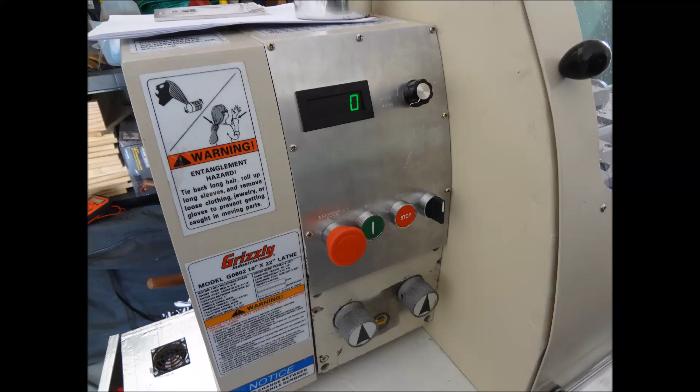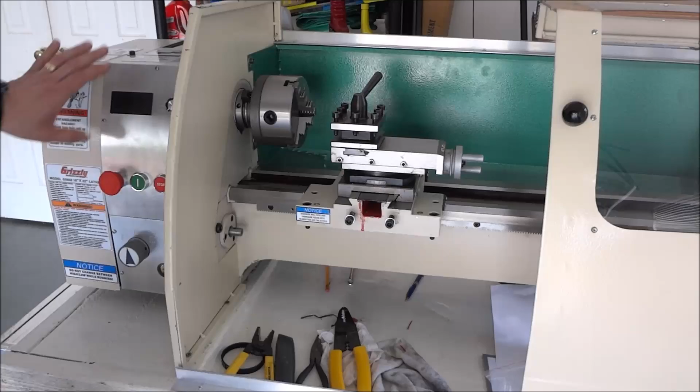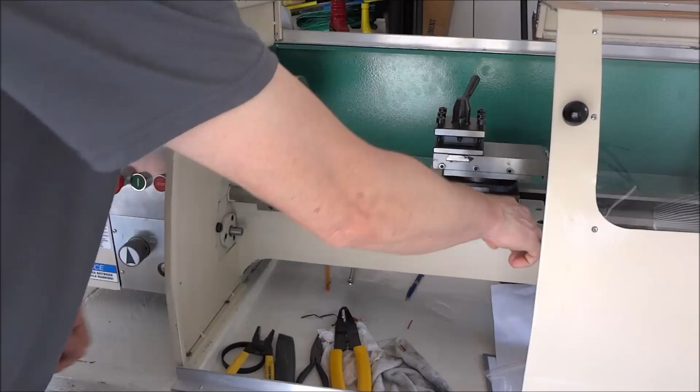Okay, so now that we've got our VFD, our electronics cabinet all connected, we've got the lathe running. Now it's just a matter of starting to do our mounts for our ball screws. First we're going to tackle the Z-axis so we can get this moving back and forth. And to do that, we've got to make some mounts to mount under our cross slide, and also an adapter to go onto our gearbox here. And so those are the things we're going to concentrate on first. So let's get started.

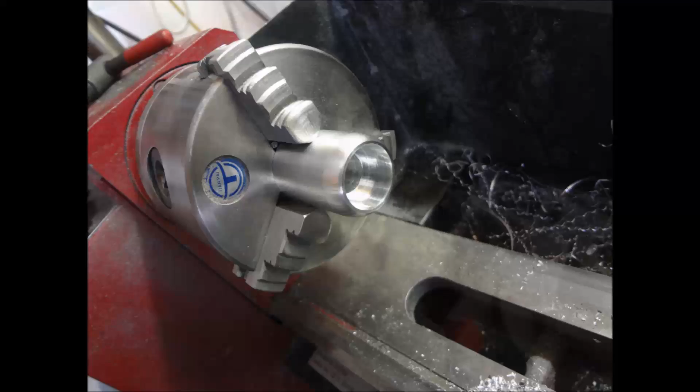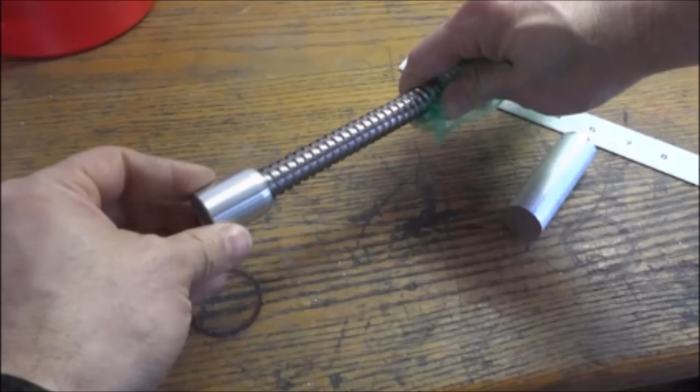Okay, so we've made our coupling. This portion right here goes on the shaft of the change gears. The bearing here rides on the end of the ball screw, like so. And then the ball screw will be able to turn freely. Very good design. It utilizes the shaft that's already there to keep everything centered. There are actually two bearings in here to give it a little bit more stability. It's just made out of aluminum, some 1-inch stock. Alright, so our coupling's made.

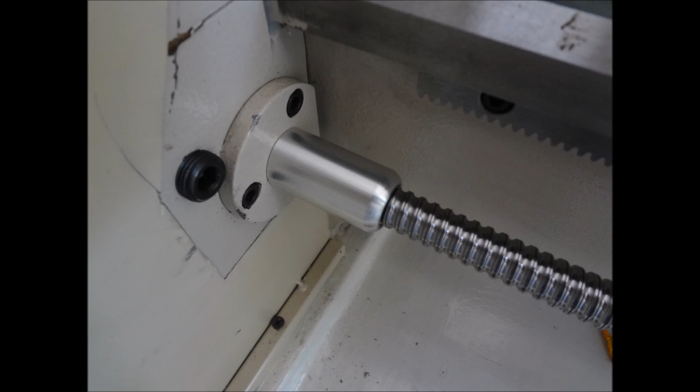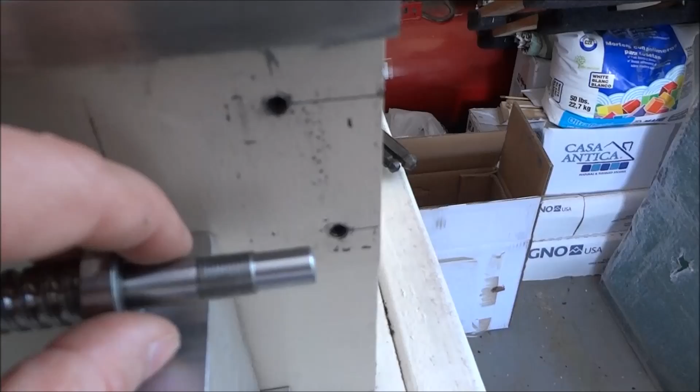Okay, so we've got our ball screw in and our coupling in. And so now I'm going to try to work on my mount here. I'm going to make a back plate right here. This is just going to be some 1/4-inch flat stock, and I'm going to work on it now.

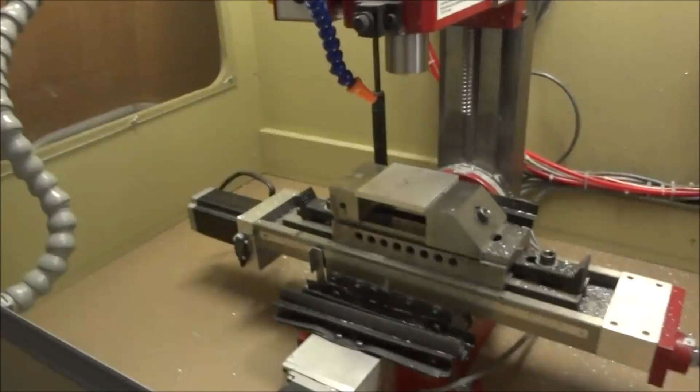Okay, so now I'm working on the Z-axis stepper and ball screw bearing mounts, and this is a back plate. So let's cut it out. Got it loaded in Mach 3 and ready to go. Got a 3/8" end mill to do the side cleaning. Now we're doing a finishing pass. Line cutting.

Okay, so we're going to start drilling our holes now. I've got 4 holes I need to drill. Got a center drill in here. Okay, I'm going to drill 4 holes. I'm using a 1/8 stub drill. This is 7 inches per minute, no peck.

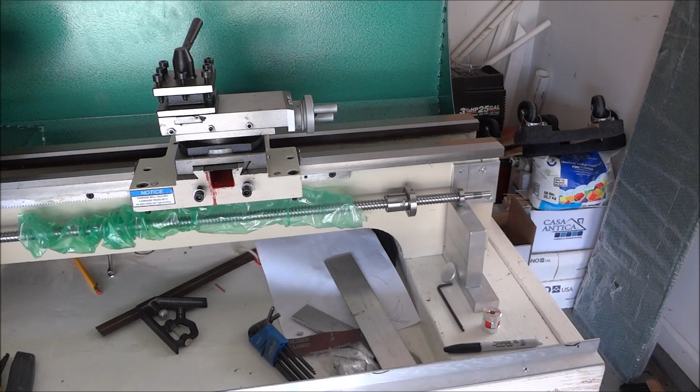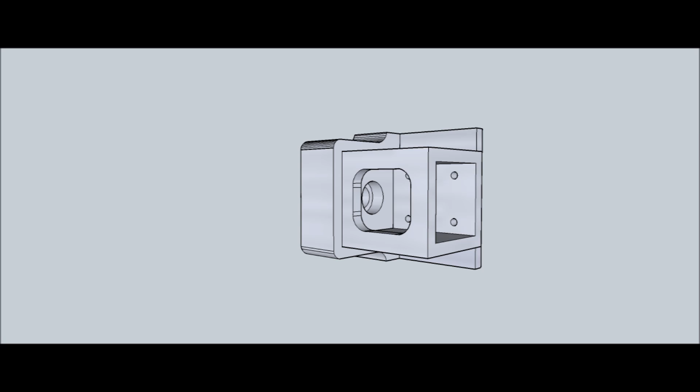So now that we have our back plate made, the next piece is going to be our bearing block. There'll be 4 pieces total when we get finished with this bearing motor mount for the Z-axis. Here is a model that I drew up in SketchUp of the finished assembly, and you can kind of see how it's being pieced together. And so now let's start machining the bearing block.

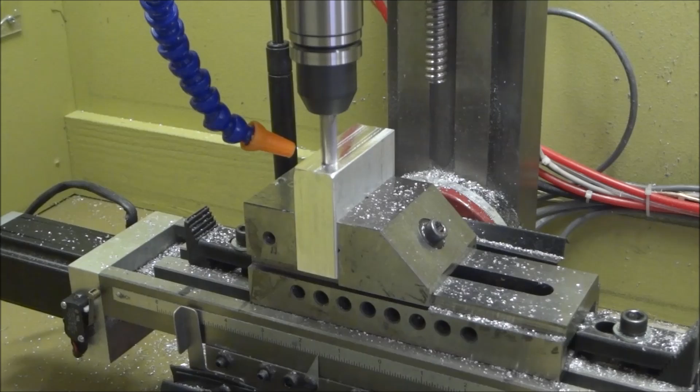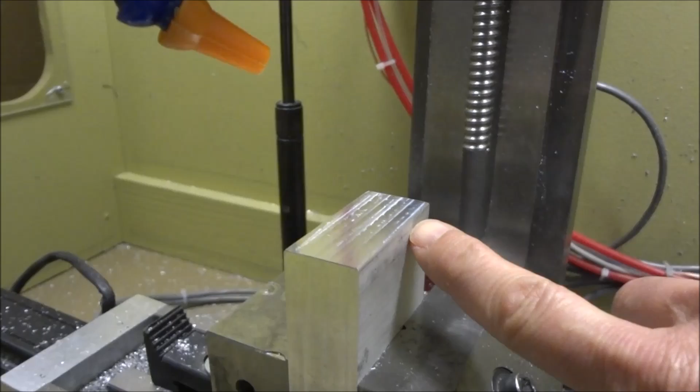Okay, we're working on our bearing block for our Z-axis. Right now I'm squaring all 4 sides. I'm using a 3/8 inch end mill, 8 inches per minute at 0.02 depth of cut, 20,000. I'm actually going to be putting a small radius here and taking off about a 1/4 inch, and then putting a small radius here. Now I could have laid this flat and did a profile. However, this piece right here was almost exactly the right size, and clamping it up would have been a little difficult, so I decided to go this route.

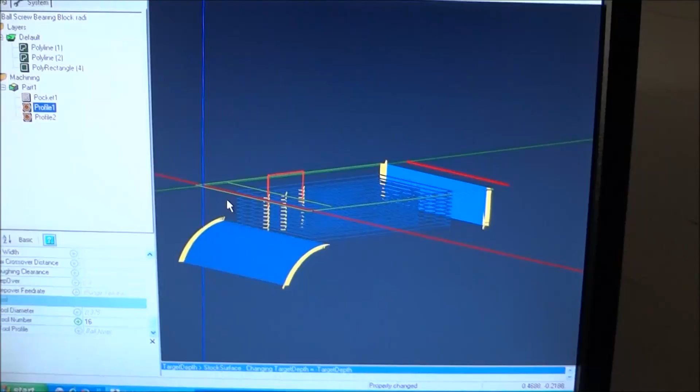These are the tool paths that I'm going to be doing in my CAM program. I've got a couple of radius profiles which will be done with a 3/8 inch ball nose, and then the step will be taken care of with a 3/8 inch 4 flute end mill. We're going to do the pocket first.

Okay, so we finished our step, and now I'm just putting in a ball nose, 3/8 inch ball nose, and we're going to run it down here and put a radius here, and then I'm going to round over this side. Start rounding over the end. Back drilling, 1/8 inch drill bit, 1/4 inch.

So we've got our bearing block in here. We've already bored our holes to mount our spacer, and now we've just got to put a pocket for our bearing. And the first thing I did was take a scrap piece and put a pocket in here to make sure that we've got our diameter just right. It's not a press fit. And now just got to go and repeat the same pocket inside our bearing block. Scuffing out the recess of the bearing.

Okay, and we're going to go back now and we're going to finish it with a 4-flute 3/8 inch end mill. Okay, looks good. See what kind of fit we got. Perfect. Bearing just slides right in and it's flush. Very, very happy with that. I don't need it to be a press fit. I just need it to go in there. I think that's perfect.

Alright, so now I'm just going to surface the top of this just to clean it up. The trick's going to be when we flip the bearing block over, getting the bearings lined back up.

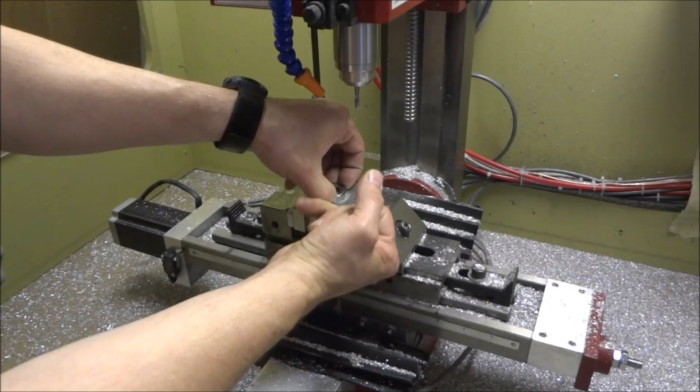Okay, so we've got our bearing pocket on the other side milled out. And again, the bearing just kind of drops right in there. Very nice. Now we need to cut our

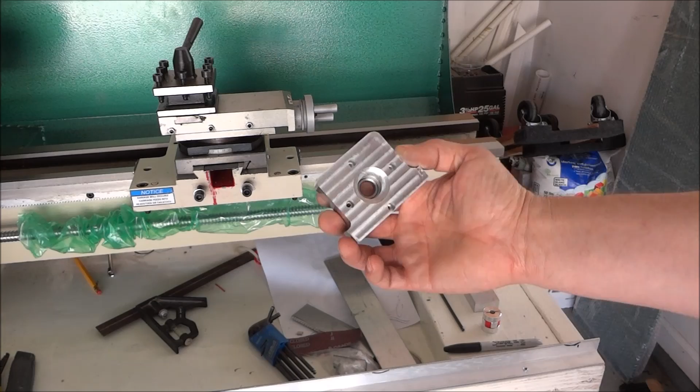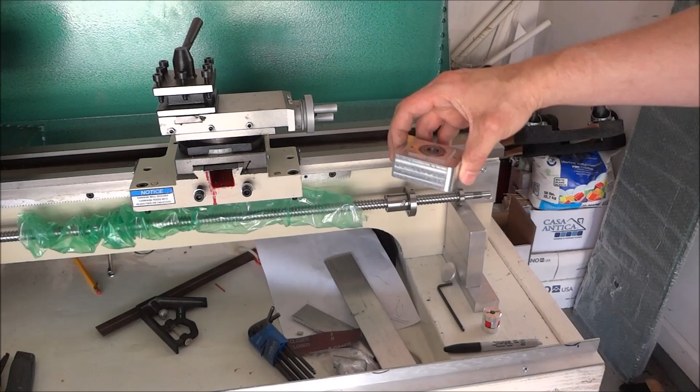Finished bearing block. Turned out really nice. Very satisfied with the finish. There are a couple different ways I could have machined it. I could have just mounted a block into the mill and then did the profiles and everything. But because I already had a piece that was just about the right size of stock, I chose to do it the way you saw in the video.

It probably took me a little bit longer, but it's okay. It turned out really smooth and really nice. I'm very satisfied with it. We'll have a standoff that goes right here, and then this will go towards the headstock, and it'll just slide in like so. And mount to the back plate.

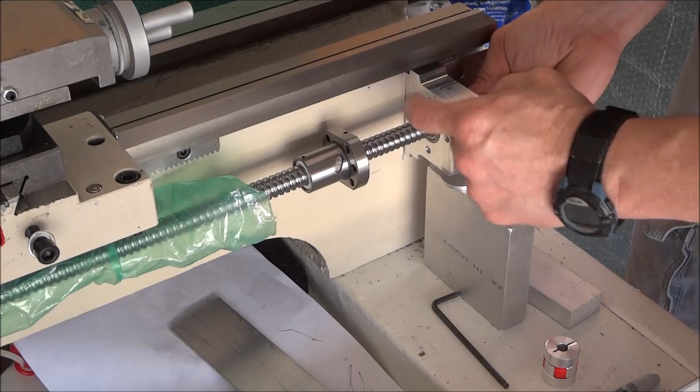You may not be able to see this, but the block is not exactly flush with the end of the backing plate, and if I slide it out, if you'll look right here, that's going to create a little play, which is going to cause backlash. So my solution for that is I can either cut a spacer on the coupling side, or what I'm going to do is put these Belleville washers in there.

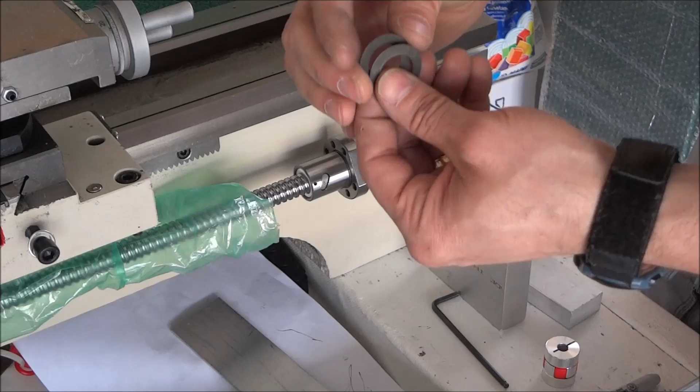These are real thin disc shaped washers, and when you put two of them together like so, it creates a gap in the center. I'm actually going to turn them opposite so that there's a gap like that, and it'll touch the outside of each, the bearing and the race inside, and then those will squeeze together and give me the spacing that I need.

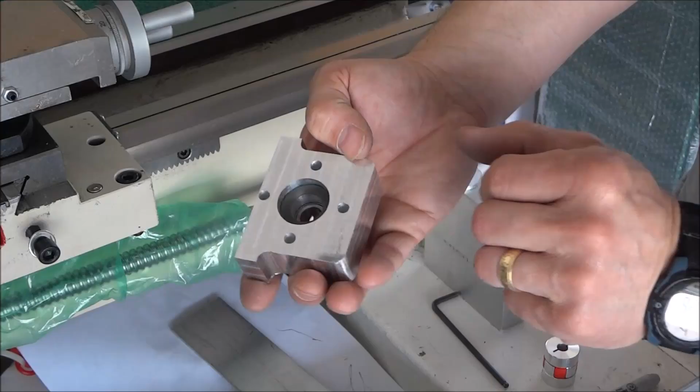So I'm just going to drop these in there like so, and then that will give me the pressure to keep everything pushed up. Now it's not at the end, and I can push on it, and that'll give me tension. So that's that piece. Now the next piece that I'm going to work on is the actual standoff, and then we're going to work on the mount for the stepper motor. So let's get started. We're milling the standoff.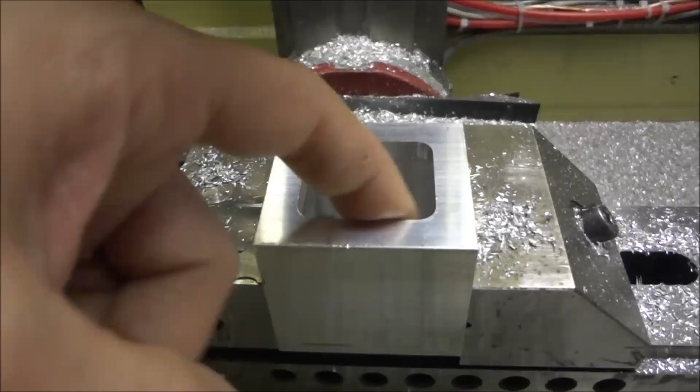So we're going to be cutting a slot in our tubing here to allow for us to get in there with an Allen wrench and tighten up our coupling. So let's get started. We've got a 2 flute 3/8 inch end mill. Turned out really nice. Moving right along.

Okay, so now we have our standoff made. It's just some square tubing, and it will fit in that square pocket that I made. And these 4 holes will actually bolt to the backing plate. And then I'll actually bolt through here with 4 holes that you saw here. That'll hold everything together like so. And then now you'll be able to access the coupling through here and tighten up the set screws.

So that's piece 3, and now we just have to do the stepper mount. I'll probably come back and maybe clean this up and surface it to get a nice finish. I haven't decided yet. It's not that critical. So now let's go make the stepper motor mount. Okay, so we're going to be doing our stepper mount for our Z-axis, and we've got a pocket and a recess, and we're going to be boring 8 holes.

Of alcohol. Try to keep it cool.

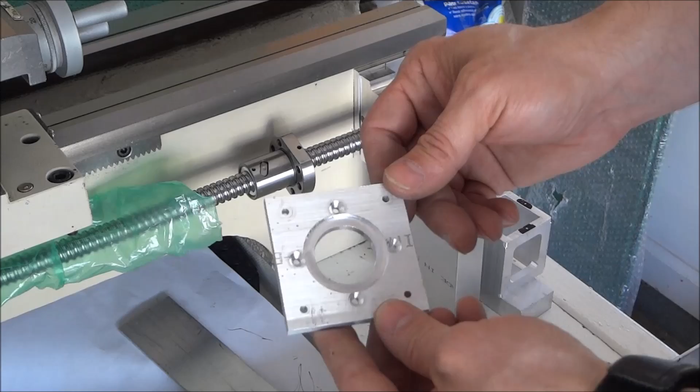Okay, so now we have our stepper mount milled out, and it's going to just go like so, and then our motor will fit on there. Our motor fits on. I still need to tap these holes to mount the motor, but now our motor mounts like so.

And then our standoff goes on there like this, and then that bolts onto our whole assembly like so. If I can get it in the hole here. Well, need 3 hands. Okay, there's that. Goes in there like that.

So, there we go. And then the whole thing will just kind of mount like so. And then we'll push it in, get that tight, take all the backlash out of it. And that should be it. So now what I want to do is drill and tap those holes and get everything mounted together and wrap up this mount.

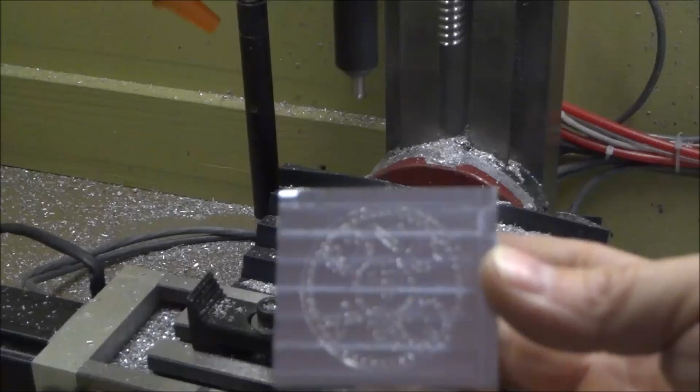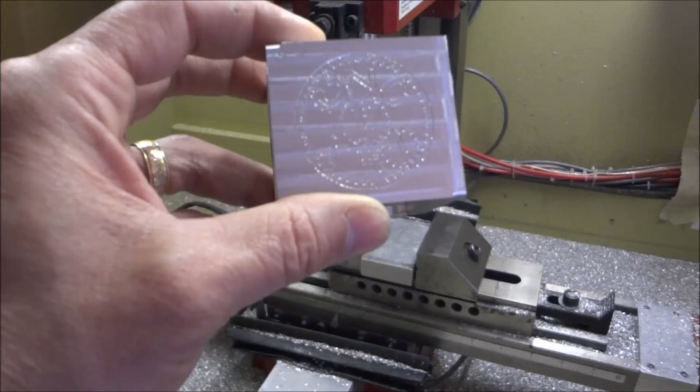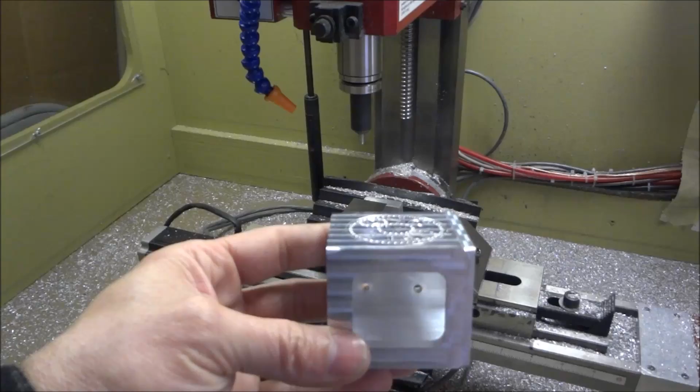Just adding a little finishing touch to the part here. Kind of like the logo I just came up with, and thought it was pretty neat. I don't know if you can see it, but just using the TTS diamond engraver. Alright, so this piece is done. I didn't bother doing the back, but just did the top and the front. Alright.

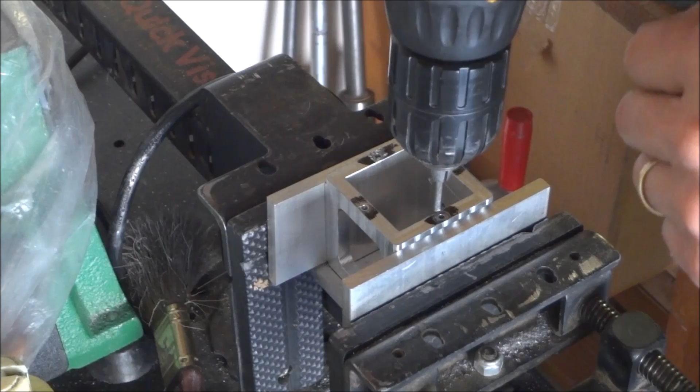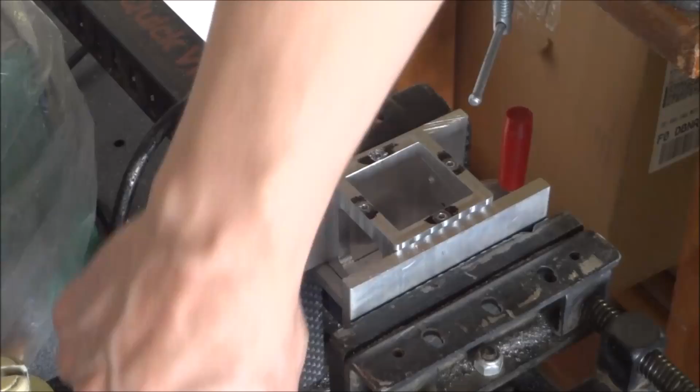Okay, so I'm drilling and tapping the 4 holes. Just using a cordless drill. Back and forth. You only got to go about 3/8, 5/16, something like that. That's about it. These are M3 by 5. M3 by 0.5, I'm sorry, threads per inch. Alright, and that's it for tapping.

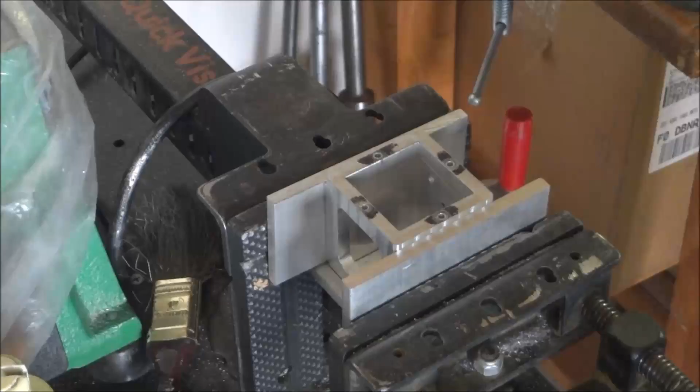Okay, so I got it clamped in here now, and I'm just going to cut these corners and clean up these edges.

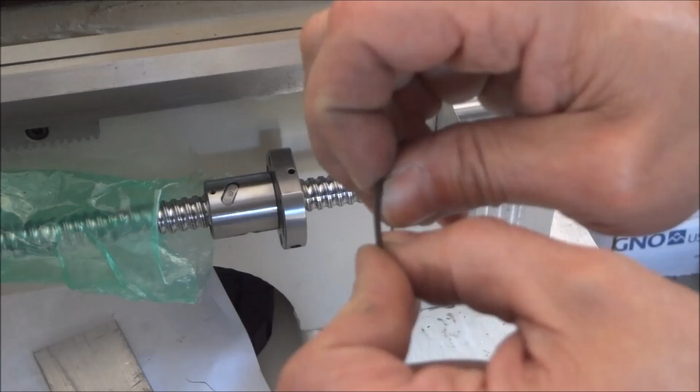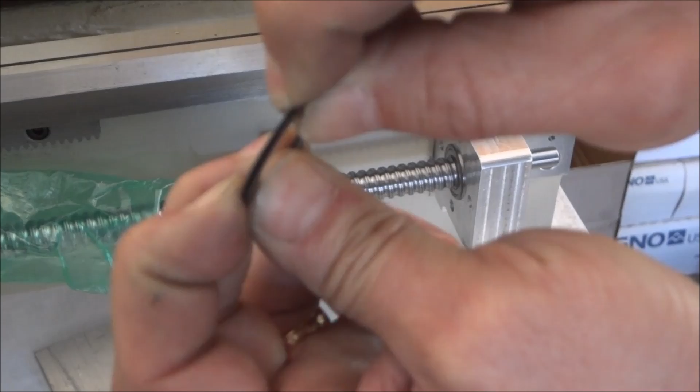I installed these Belleville washers, and they're just real thin washers. Basically, it is the same type of washer that we use on the power drawbar. They're disc shaped, and they bend. And so what I did was, inside the bearing race, I stuck them like so, 2 of them, and that left just a little gap right there, and allowed just for a little flex. And that has taken up all the backlash that was in there, and everything's nice and tight now, and it'll keep that pressure on there all the time with those washers in there.

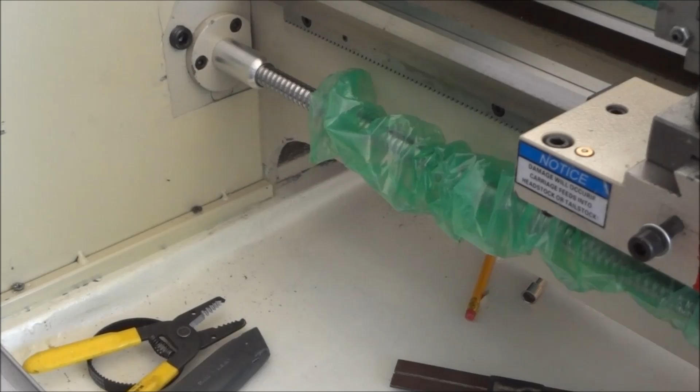Now, there are several ways I think that taking up the backlash could have been accomplished. I chose this method because I had some of these Belleville washers, and I thought it was the simplest and easiest thing to do. Another alternative would be to slide the coupling over away from the tailstock and put a set screw in here. Over time, the set screw could loosen up and wear, and I didn't want to mar the little shaft that was sticking out. So I decided to do the Belleville washers.

Now my coupling goes all the way up against my headstock here, and it's just tied up against there. There is no pin or anything. I just didn't feel like it needed a pin. It's a nice tight fit on there, and so everything's just pressed up against there. And if the ball screw happens to get any backlash with usage over time, you can just simply add another Belleville washer.

So that took care of that, and now I just have to mount this on, and we can get the stepper motor mounted. I went ahead and cleaned up these edges and rounded them over and got them real nice, and turned out good. And so now we just got to mount this. So let me get that mounted.

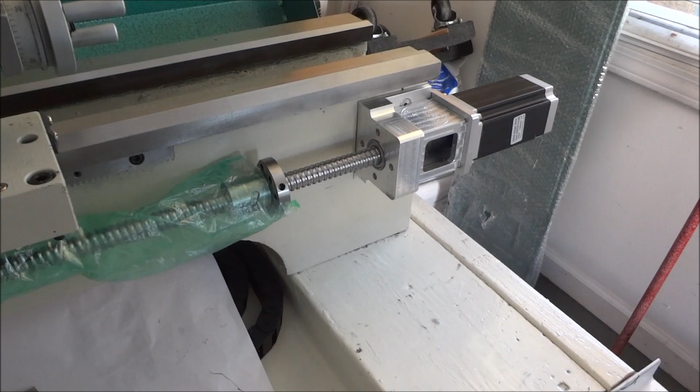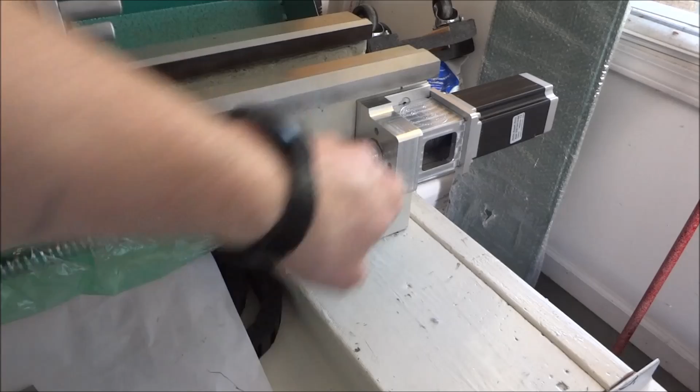Well, okay, here's the finished Z-axis mount. Got everything mounted and bolted together. I really like the way it turned out. The finish is nice, the fit, everything bolted up perfect. It's extremely sturdy, and I don't think it's going to give me any trouble. And hopefully it'll give me many years of service. The Belleville washers really did the trick, and I shouldn't have any problem with backlash. And if I do in the future, I can always add one of those washers.

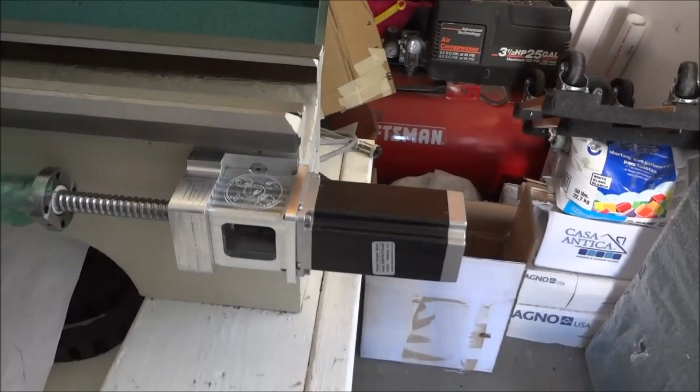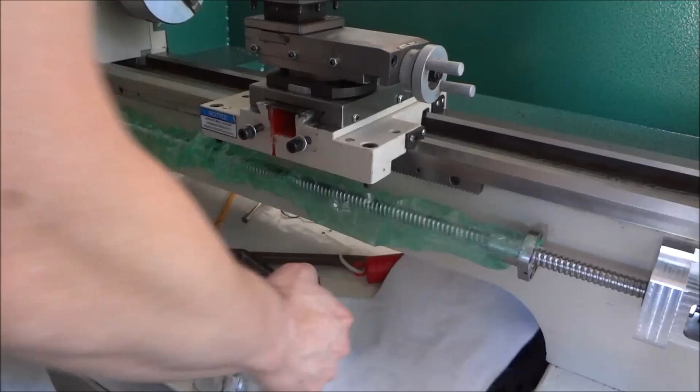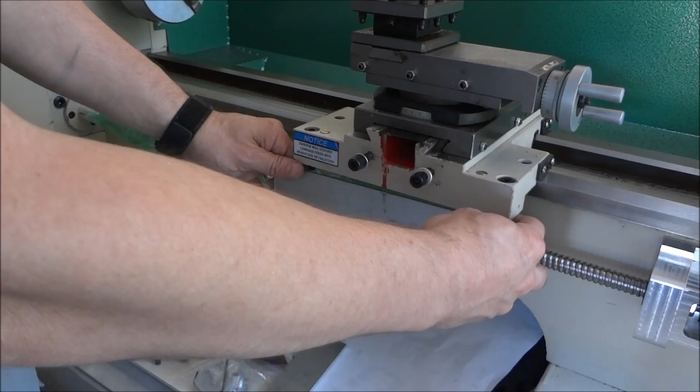So we're going to route the wire. Of course, the cabling will just be routed back behind the lathe and out of the way. So that's good. So the next thing we've got to do is work on our mount for our apron so that the ball nut will have something to attach to. Like so. It'll attach down here and move the whole assembly forward and back.

A lot goes in just to the one Z-mount. The Z-mount's the most complicated, I think, because it has the most pieces. So we'll tackle that next. Get this apron right here worked out, and we'll start on it in the next video. So there's our Z-axis stepper motor mount. Very happy with the way it turned out.